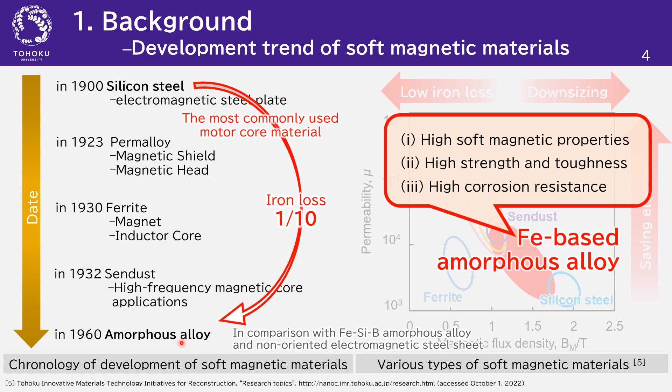Let me briefly explain amorphous alloys. When cooled from a high temperature molten state, general metallic materials form crystals and solidify. On the other hand, when cooled very rapidly, crystal nucleation and growth are suppressed, and the materials remain in a liquid state below the crystallization temperature.

Then, when it reaches the glass transition temperature, it solidifies while maintaining a random structure like that of the liquid state. Such alloy metals with a random structure are called amorphous alloys.

Unlike ordinary crystalline metals, amorphous alloys have a random structure. Therefore, there is no magnetic anisotropy and no pinning effect caused by grain boundaries, and the eddy current loss is also low because the material is very thin.

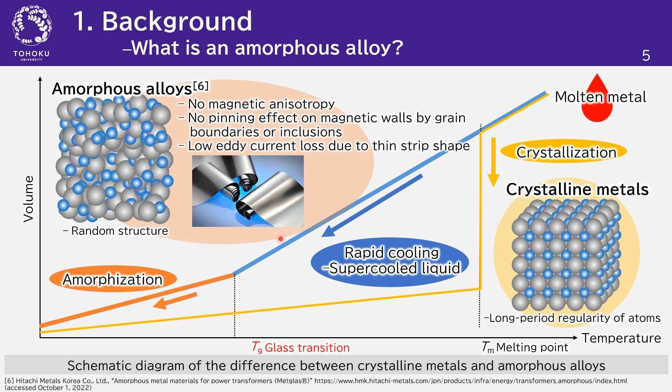For machining such thin materials, blanking is often used. In blanking, a pair of punch and die is used to cut the materials, and the material is broken by the propagation of cracks generated by the compressive force from the tools.

This is a schematic diagram of the fracture surface of blanking. First, shear droop is generated by shear deformation, and next, a sheared face is created by friction with the tool. When the material yields, a broken face appears due to the propagation of cracks, and machining defects such as burrs appear on the bottom surface.

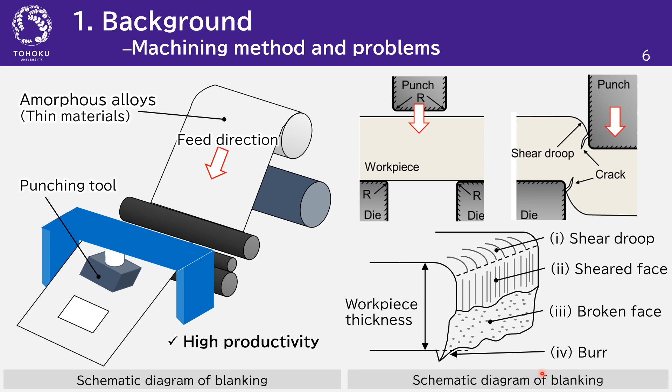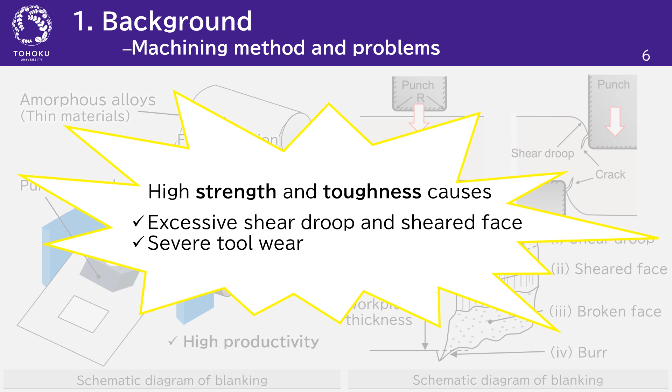Amorphous alloys have high strength and toughness. This property causes excessive shear droop and severe tool wear.

Next, I considered a way to overcome these difficulties in machining.

When amorphous alloys are heated, the random structure changes through the rearrangement of atoms and nucleation and growth, and finally changes to a crystalline structure. As the structure changes, the mechanical properties also change.

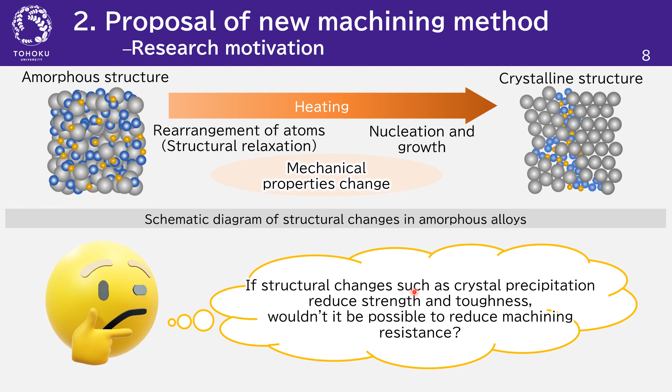So I thought, if structure change like crystallization reduces strength and toughness, wouldn't it be possible to reduce machining resistance?

I also thought that changing the whole structure would cause a worsening of soft magnetic properties and a change in product strength. So we proposed a new machining method that improves machining performance while maintaining product performance by modifying only a few micrometers of the material to a structure suitable for machining.

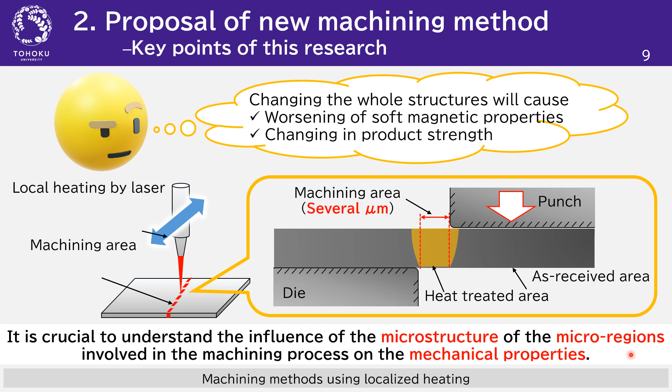Therefore, it is crucial to understand the influence of the microstructure of the microregions involved in the machining process on the mechanical properties.

These are the objectives of this study. In this study, the following investigations were conducted on Fe-based amorphous alloys as a fundamental study for the development of a new machining method.

We evaluated samples which were homogeneously annealed in order to discover a structure suitable for machining. First, we investigated the microstructural changes caused by thermal effect.

Next, microtensile tests were conducted to clarify the relationship between microstructure and mechanical properties in the microregions. Finally, blanking tests were performed to evaluate blanking resistance and quality.

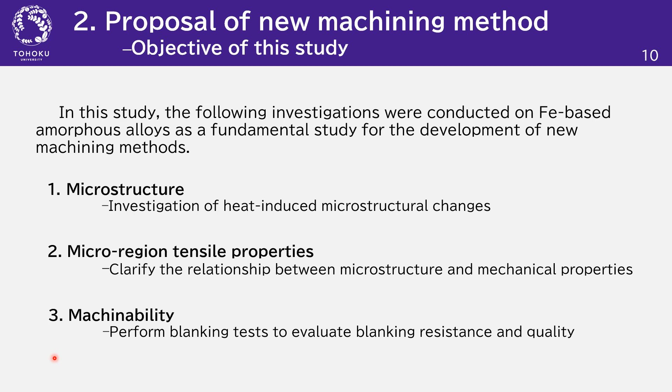Let me now move on to explain the results of the experiment. First, we tried to create different microstructures in the amorphous alloys.

We used Fe-based amorphous alloys for the experimental material. Amorphous alloys change their microstructure sensitively to temperature. Therefore, in this experiment, we used a DSC apparatus for heat treatment. DSC is a thermal analyzer enabling precise temperature control.

The sample was cut into pieces 3 mm wide and 5 mm long and set in an alumina pan like this. For heat treatment, the heating rate was set at 20 Kelvin per minute, and the sample was cooled to room temperature at a cooling rate of 20 Kelvin per minute, without holding it at the maximum temperature. Structural analysis of the heated sample was performed using XRD and TEM observation.

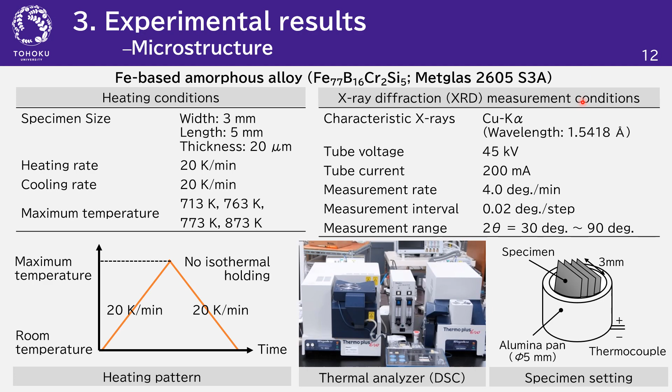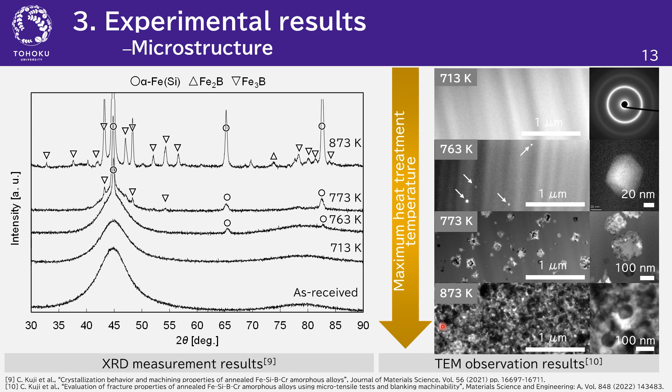The left figure shows the results of XRD analysis and the right figure shows the result of TEM observation. The amount of crystal precipitation gradually increased as the heating temperature increased. It was found that iron 3 boron was precipitated as the initial crystal, followed by the formation of core-shell-shaped composite crystals, and finally it was completely crystallized.

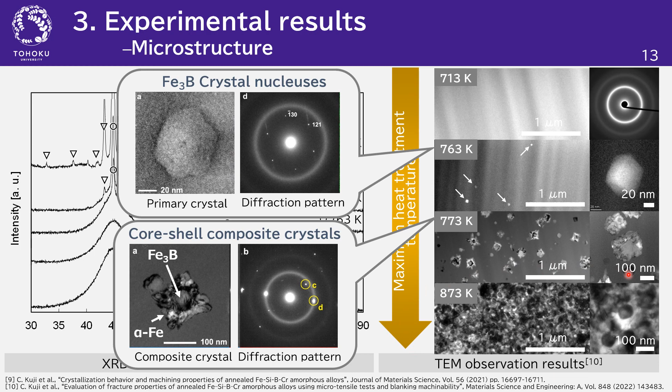Next, I performed microtensile tests on amorphous alloys heat-treated to various structures, and we investigated the effect of microstructure on the mechanical properties in the microregion.

In this study, we performed microtensile tests in the FIB apparatus. In this method, tensile properties are evaluated by applying the both-ends-fixed beam problem based on linear elastostatics. A probe, a microtensile sample, and a Si both-fixed beam are fabricated in the FIB apparatus, and then each element is bonded by tungsten deposition.

The sample is formed to a width of 0.5 to 1 micrometers and a length of about 5 micrometers. Next, the probe was pushed toward the tensile direction until the sample was broken. Movies were taken during the test, and the amount of deflection of the beam and the elongation of the sample was measured from snapshots of the movies to obtain the stress-strain curves.

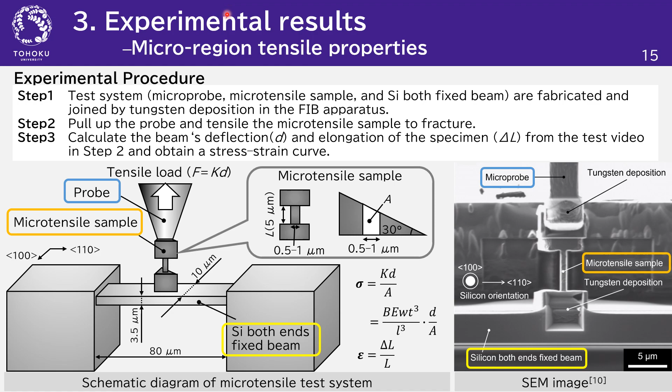Here is an example of the snapshot obtained in the microtensile test movie. From the captured image, the length of the specimen and deflection of the beam during the tensile test are measured. Stress and strain can be obtained from these formulas.

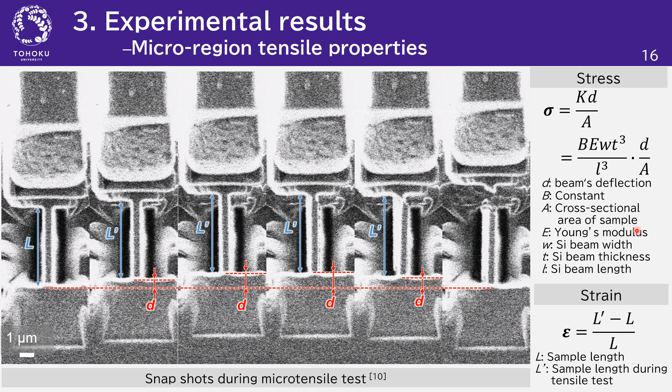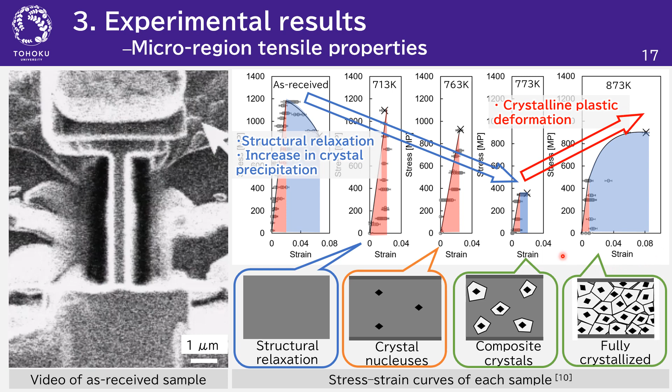On the other hand, when fully crystallized, crystalline plastic deformation increased and the strength and toughness increased again. Furthermore, we observed the fracture surface of each specimen. Specimens exhibit a microstructure-dependent fracture shape.

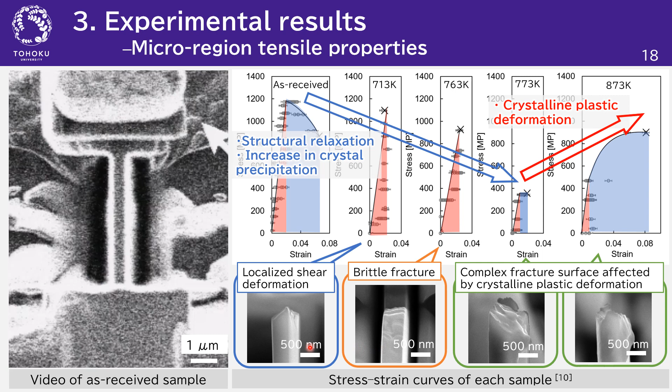To summarize the experimental results so far: the amorphous alloy fractured in the elastic range under conditions of structural relaxation and the beginning of crystallization. The tensile strength was reduced the most in the sparsely precipitated composite crystal state. Plastic deformation occurred with increasing crystal precipitation, and strength and toughness increased again when the amorphous alloy was fully crystallized.

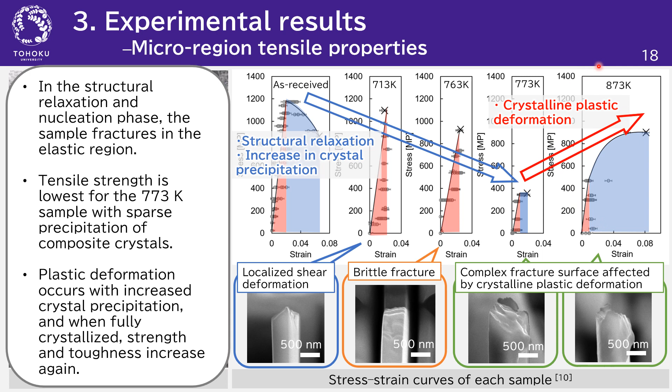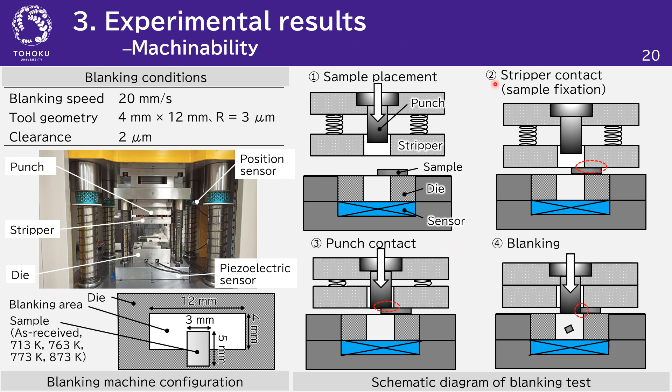Finally, the influence on the mechanical property of the microregion on machinability was investigated. In this experiment, blanking tests were performed on the samples whose microstructure and mechanical property had just been evaluated. We measured the machining resistance and evaluated the machining quality.

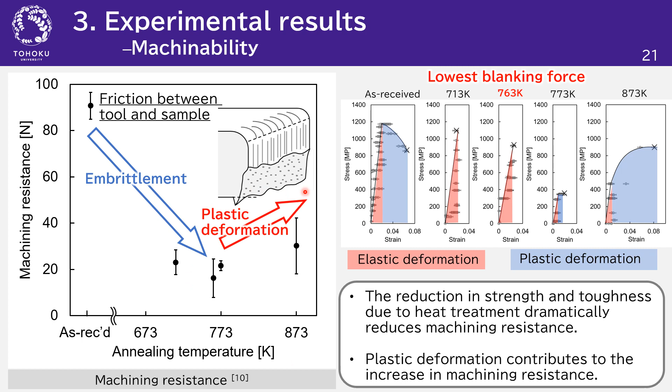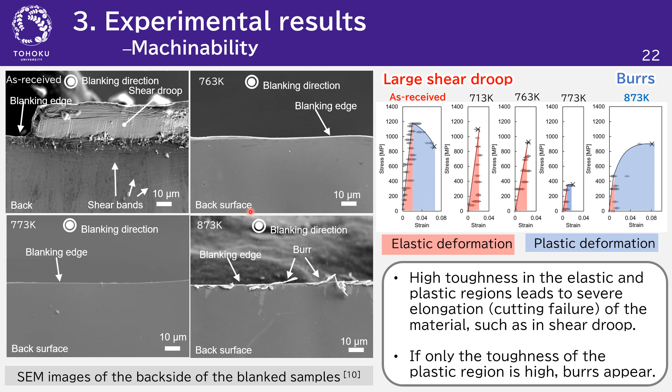The left figure is the same image of the machined edge observed from the backside. Excessive shear droop appeared on the as-received specimen with high strength and toughness, and burrs appear on the fully crystallized specimen. In other words, it is clear that machining quality improves in the intermediate structure of crystallization.

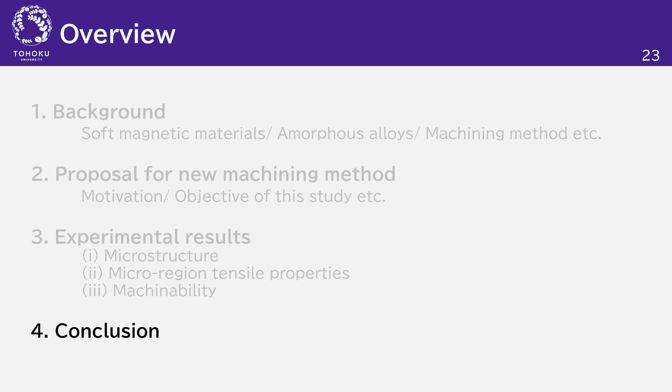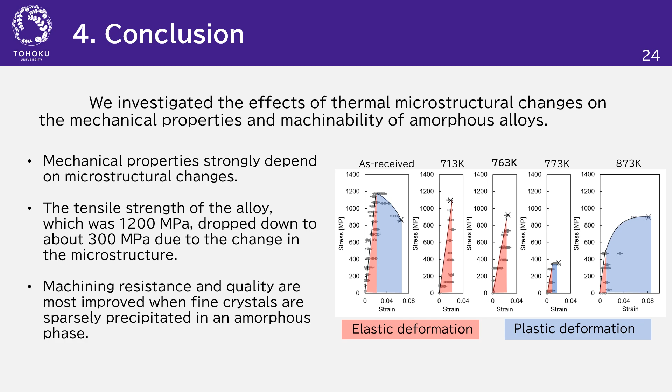Finally, we summarize this study. We investigated the effect of thermal microstructure changes on the mechanical property and machinability of amorphous alloys. We found that mechanical properties strongly depend on microstructure change. The tensile strength of the amorphous alloys dropped due to the change in the microstructure. Machining resistance and quality are most improved when fine crystals are sparsely precipitated in the amorphous phase.